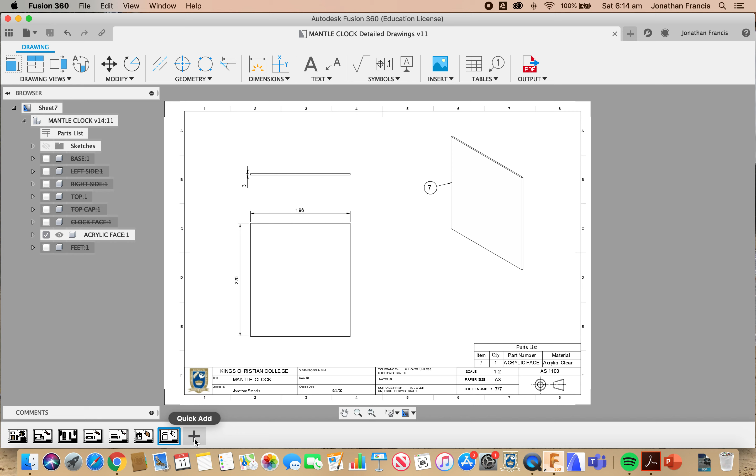Detailed drawing of the feet component. This will be our last detailed drawing, and we'll conclude the set of drawings that we have down below here. So hit the plus.

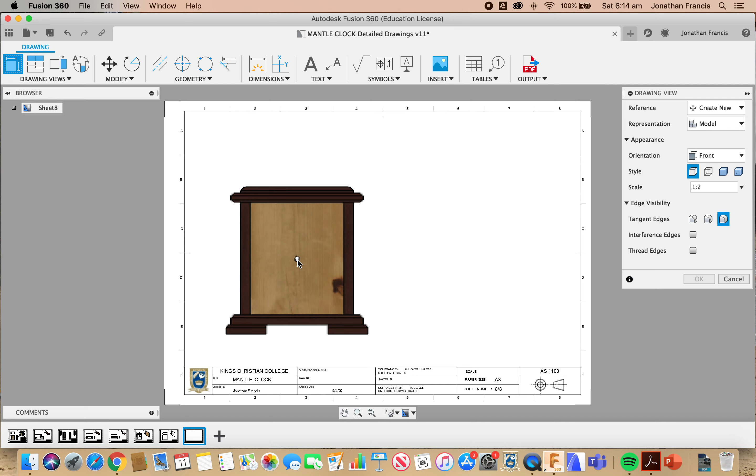Let's grab a base view. We might place the front view somewhere down here. Before we do, we're going to jump in and change that scale to 1:2, so we can see what we're doing. Place that view, click OK, and for the last time we'll uncheck

all of these things. We just want the feet. We can then move that view probably down just a little bit.

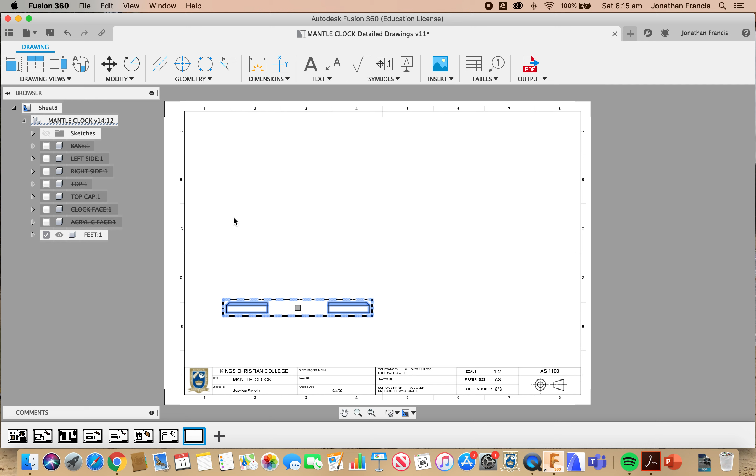Let's do some projection. We're going to project the top view, the side view, and we'll project that pictorial view there as well. And hit enter.

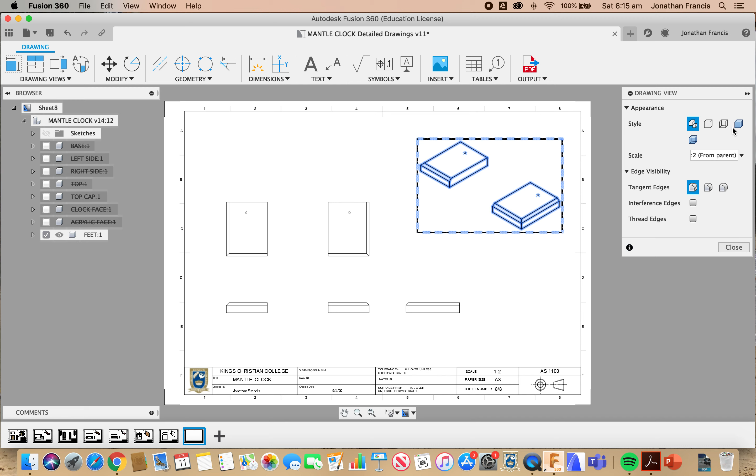We'll double click on that pictorial, change that to a shaded drawing, and it gives us what we're after.

Back up to table. This should be pretty quick for you now. Place that table in. Using the grey node, pin it to the border, double click, turn it the right way out, and hit close.

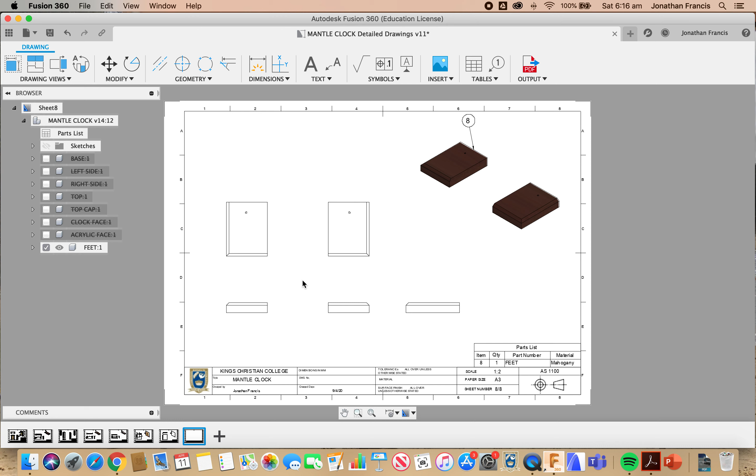We're now looking to dimension this, just as we have all the other drawings. So we'll zoom right in, and we'll get started on adding some dimensions. So we'll start at the top.

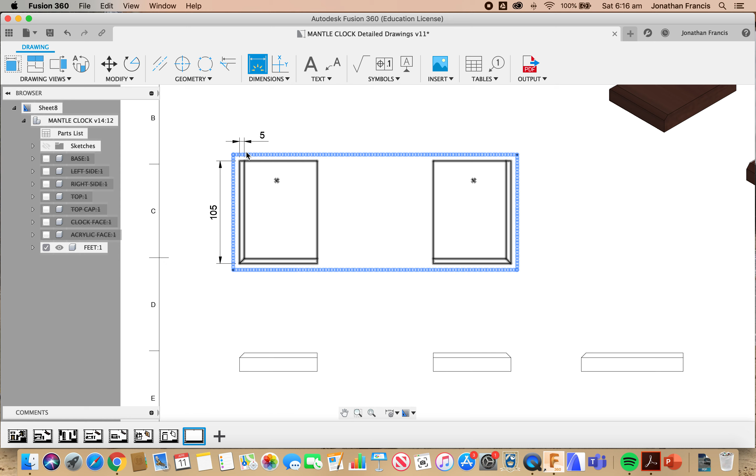We'll go with an overall dimension, that to the side there. Add a dimension here for our chamfer. And we might add a dimension for our circle coming in off the back here too.

So I'm just going to zoom in a little bit closer. So from there to the edge. And I'll just drag that out to the side here, and place that one in there.

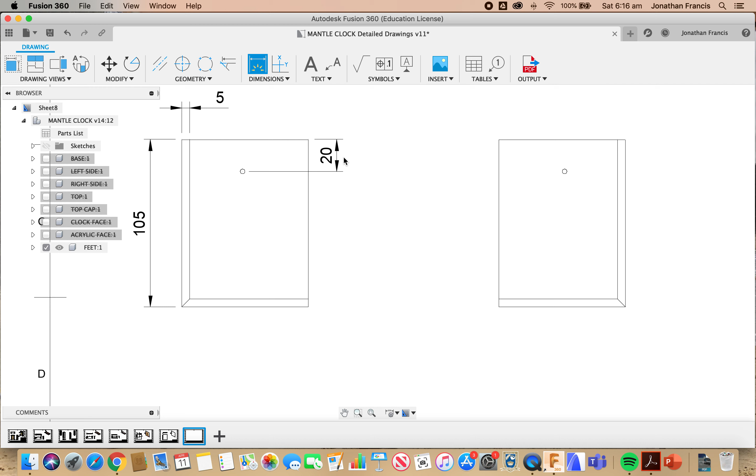While we're on the circle, we will add a center mark, and I'll do that to each of those circles so we can see where they are.

I might also add one more dimension up the top here. So from the center to the edge. And we'll place that one up there.

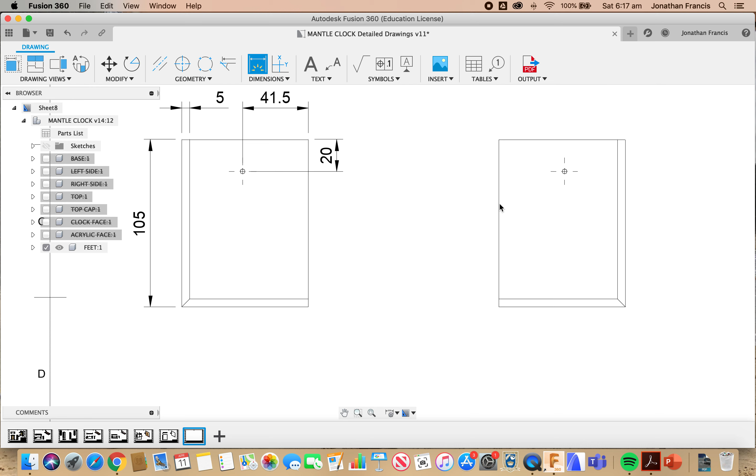If we go to our second foot, the only dimension I'm going to put in here is a diameter dimension. We'll do that. Select the edge, and we'll drag that out, put that up the top there.

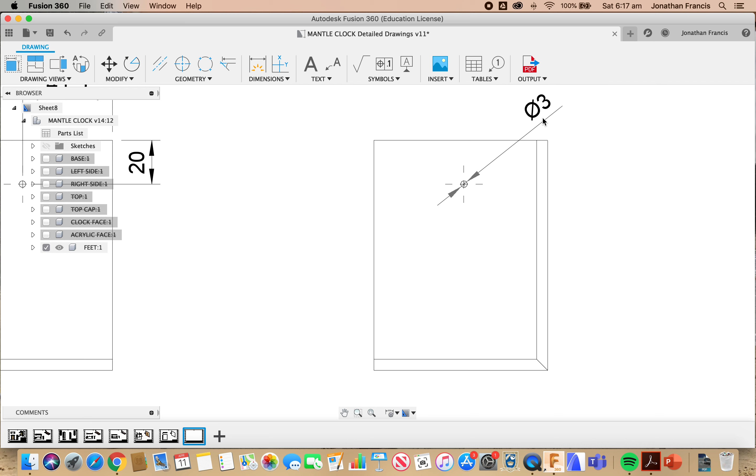If we go further down to our front view, what I might do with our front view is actually select that and change that to show us some hidden detail. You need to see what's going on in there before we then add further dimensions.

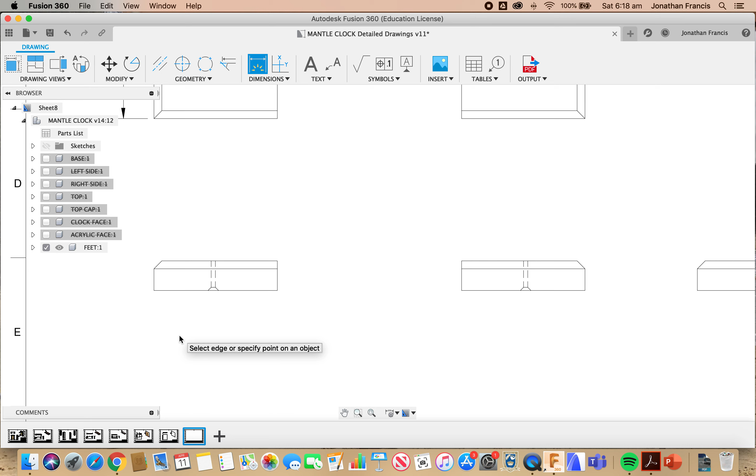Again, overall dimension, we might put over here. There's 80. We have a thickness, again, which we can put over here, 19.

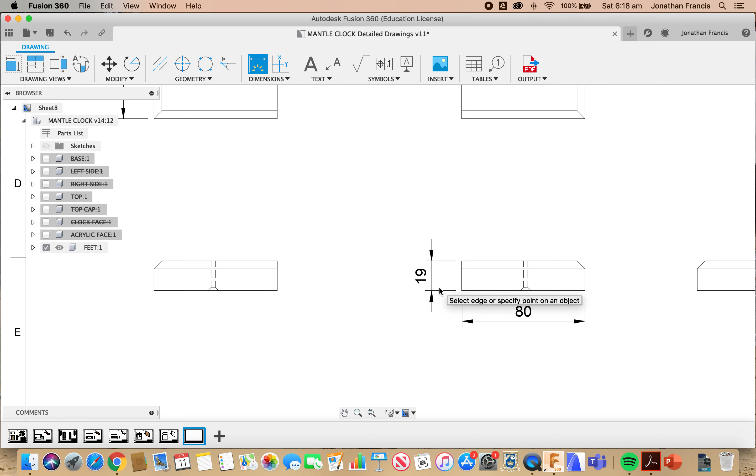Now on this side, I'm going to go through and do a little bit of the detail of the hole and the chamfer in here. So I'm going to zoom right in there.

To start with, we're going to put in a centerline. There's our centerline. We have the dimension or the diameter of our circle being 3, which we put on our top view.

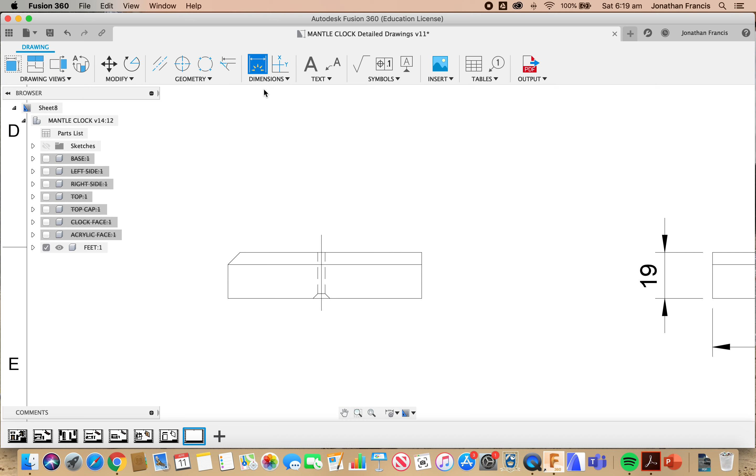We want to also dimension the width of our hole here. And if I can, I would like to do an angular dimension.

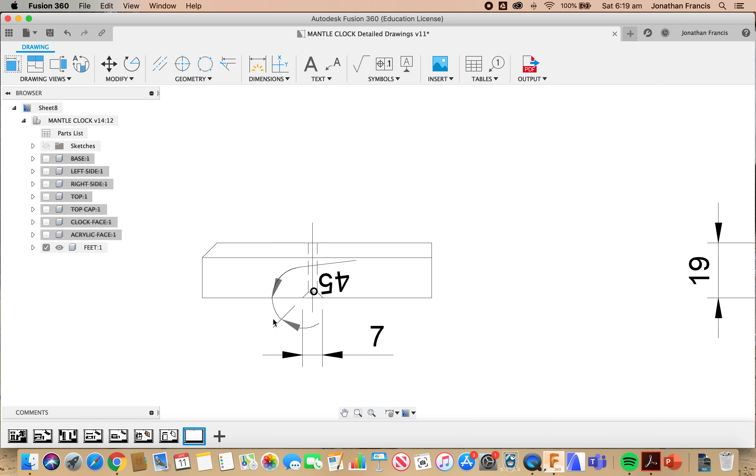Tucked in there as well. It gives us an idea that that's a 45-degree line.

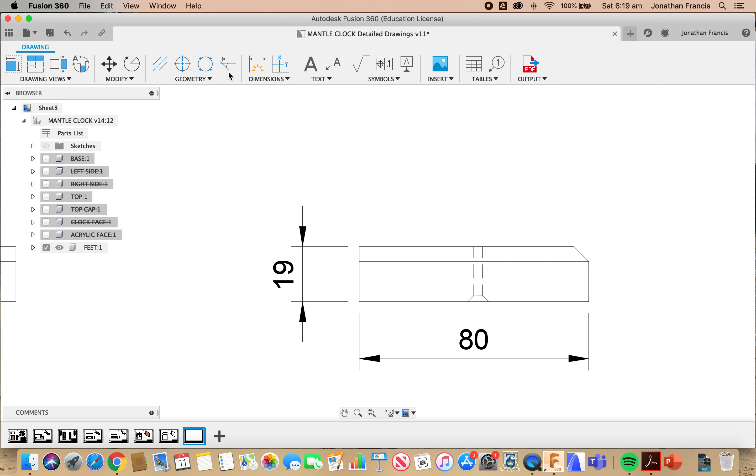If we move back over to the other half of this view, I'll put that center line back in there again just for consistency. And that view is now complete as well.

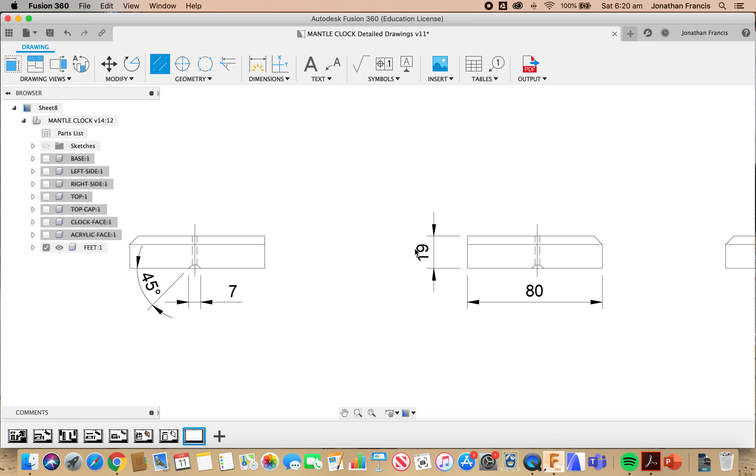So if we zoom back out, you can see we have the angle, the overall size, etc. So let's move on to the side view.

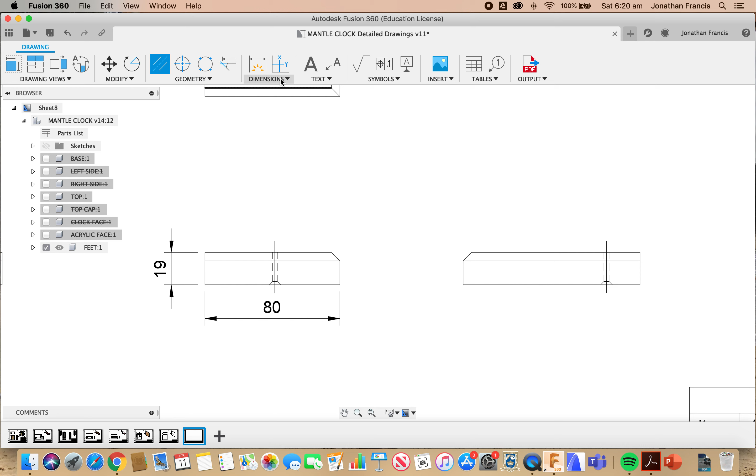The side view, again, we have our circle with our detail. So I'm going to put a center line in there. And on this particular drawing, all we're really after is the depth of that chamfer. So you go from this edge to this edge and pop that in there.

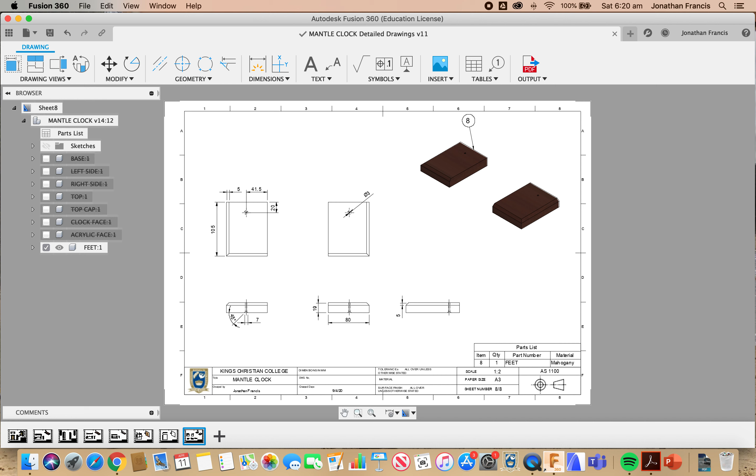Fit to screen. Make sure that we've got everything dimensioned, and then select Save. And that brings you to the completion of your set of drawings.